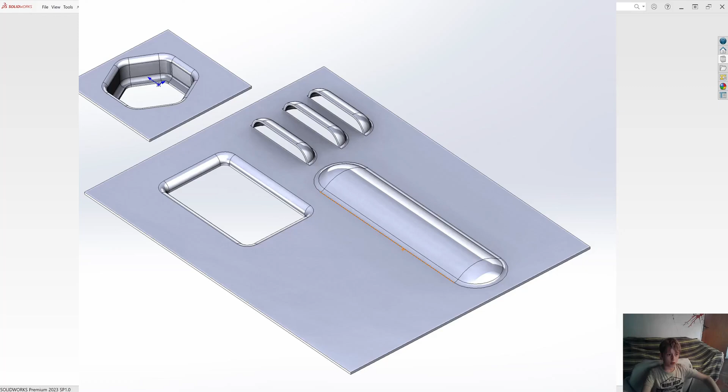I'll click on the home icon, front plane, sketch, center rectangle, 50 by 50 millimeters in terms of overall dimensions approximately, and we'll extrude it by 1 millimeter.

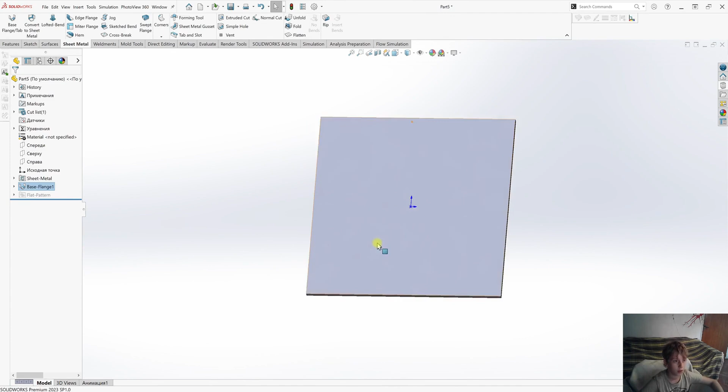I created this base to demonstrate how the library works. Let's go into the stack of books icon. At first, we don't have a design library folder here.

To specify the path where our library is located, we click on this button. This is the file location. Here, we set the path to our file and specify the design library here. Now the design library appears, and after that we can add components to our part.

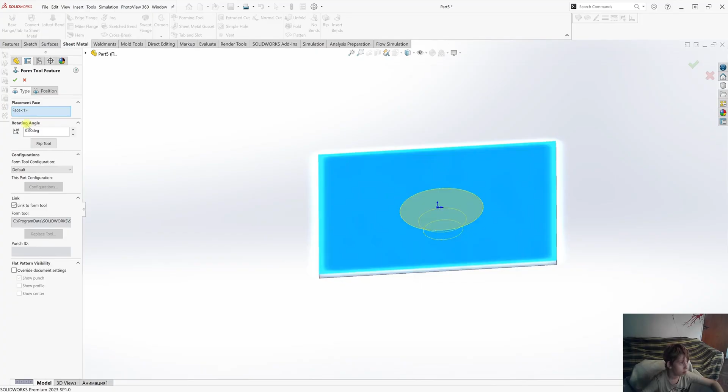Design library, let's say emboss, and let's insert, for example, this element. We can see that when we insert our element, several settings appear. In these settings you can specify several parameters.

The first parameter is flip tool. With it, we can indicate which direction our element will be extruded. You can also specify the position of our element here. It has a point that allows us to move it, and we can also set dimensions for it.

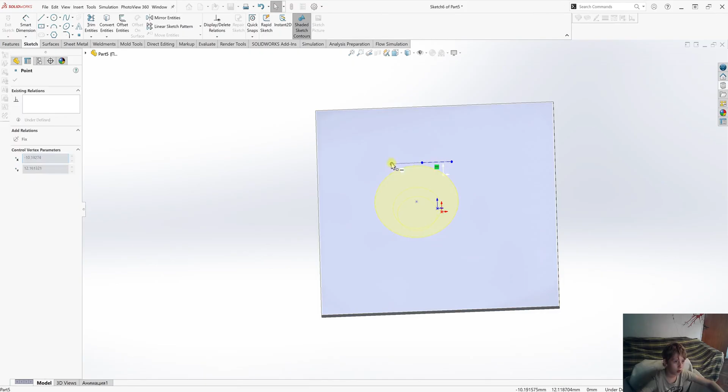Now I'll show you how to create another element. By clicking on the point and creating another point, another element will appear. And we can see that this kind of element has been created.

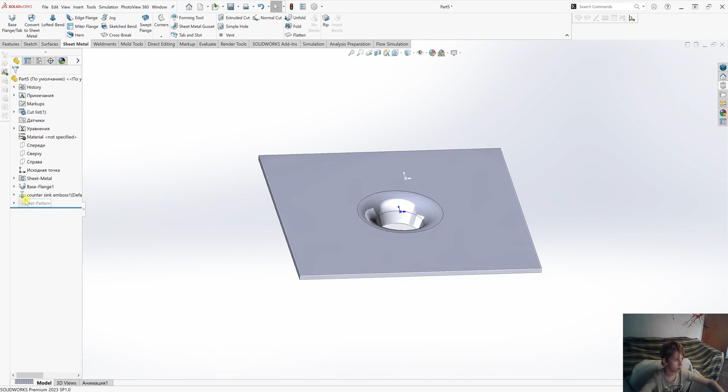Now I'll show you how to edit such elements. After that, I'll explain how you can create them.

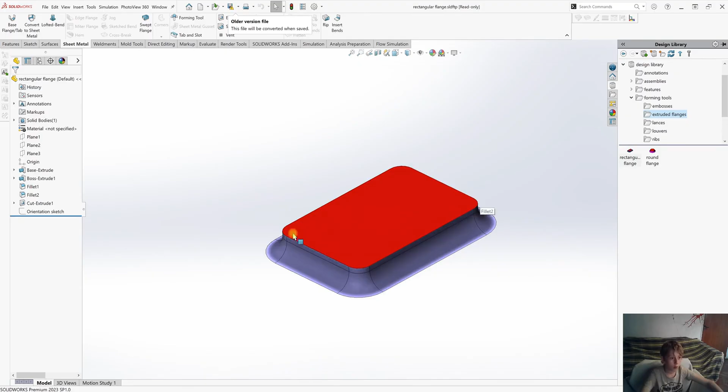Let's select, for example, rectangular flange from the extruded flanges folder, right click on it, and choose open. We select open read only. We can see our element. To edit it, go to boss extrude and select edit sketch.

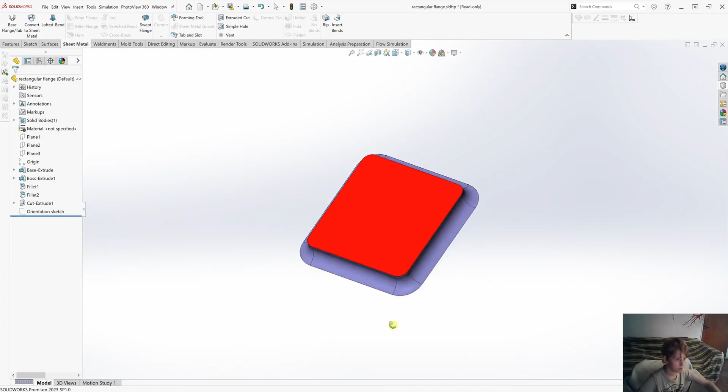Let's change 20 to 30 millimeters. It says that we are modifying an old file. 30 millimeters, okay. Next, for the extrusion, let's set the length to 70 millimeters.

Then we'll edit the base extrude sketch in our design workspace and change its width to 60 millimeters. Exit the sketch.

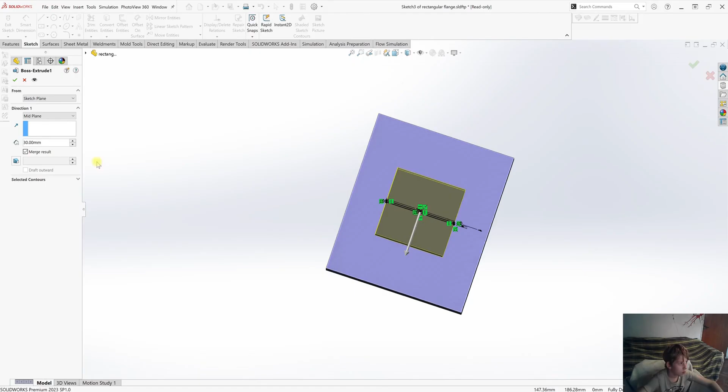Now let's change the length of our flange. Instead of 30, let's make it 50 millimeters. Okay. Now we can see that the flange has been lengthened. And we can also save it.

File, save as. We can save it either in SLDFTP format, or we can save it as a regular format, as a SolidWorks part. Click Save As, copy and continue, and let's save it.

Honestly, I really should have changed the file name earlier. I'll go ahead and set the name to larger rectangular flange right now just to make things clearer. I'll remove the format here to avoid any errors, in case you accidentally added an extra letter, and then I'll click save. Save. And it's saved to our library directory.

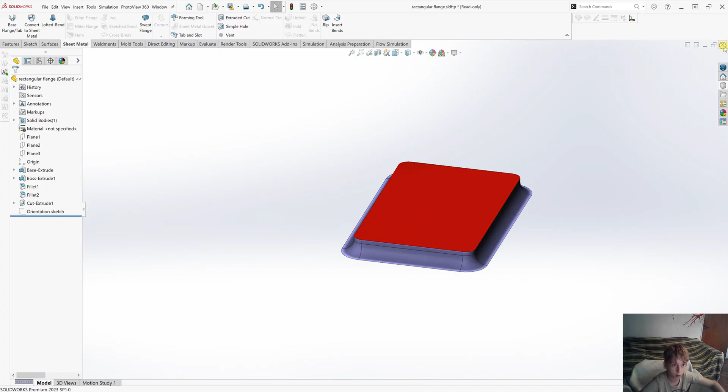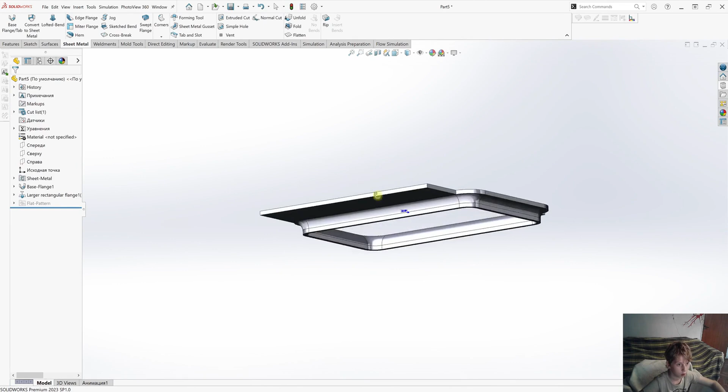We can close this file without saving, and then in this file, go to the library and see that our file, larger rectangular flange, has appeared. Let's insert it by dragging it from the library with the left mouse button, and click OK. You can see that our flange has appeared right here on the screen.

Our rectangle is just a bit too short. Our flange doesn't fit into it. You can see that it has appeared. It's been cut out in our plate.

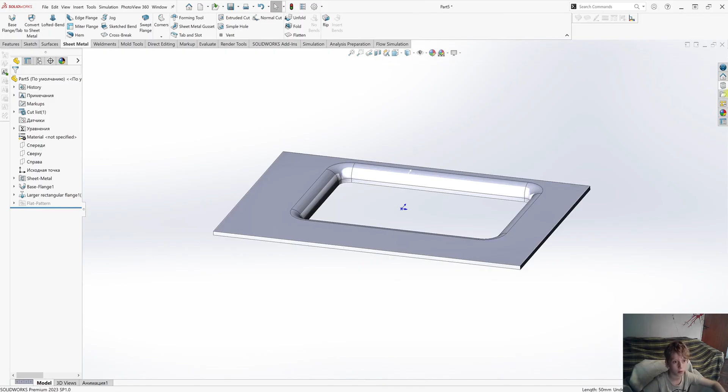Now I'll show you how to create such elements yourself. Let's close our file, we don't need it anymore. New part, front plane, sketch.

Let's draw a rectangle 50 by 50 millimeters from the center, measuring exactly 50 by 50, and we extrude it by 10 millimeters. This is the base we've drawn for our element.

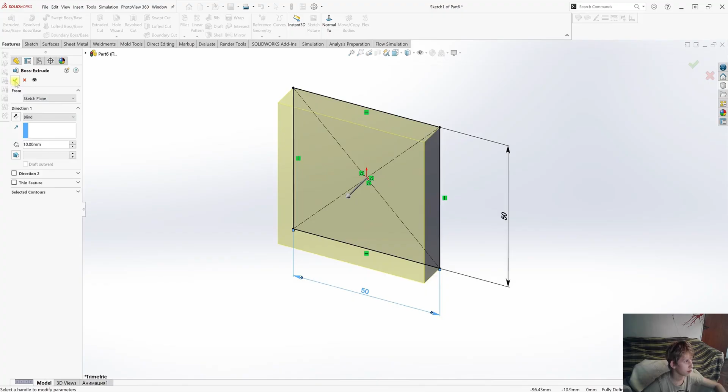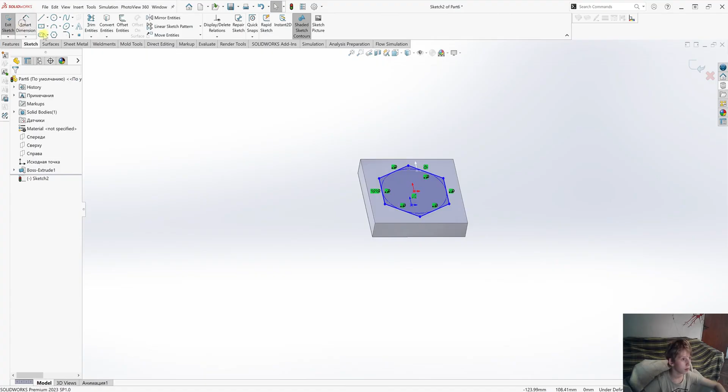Now, on this plane, we draw a sketch, select polygon, 6 side, Ctrl 8. We make the lines parallel to each other and then carefully adjust and set the width to 30 millimeters.

Next, we extrude it by 10 millimeters as well. We make a fillet of 5 millimeters. As you can see, it suggests the entire perimeter, so it applied it to the whole perimeter.

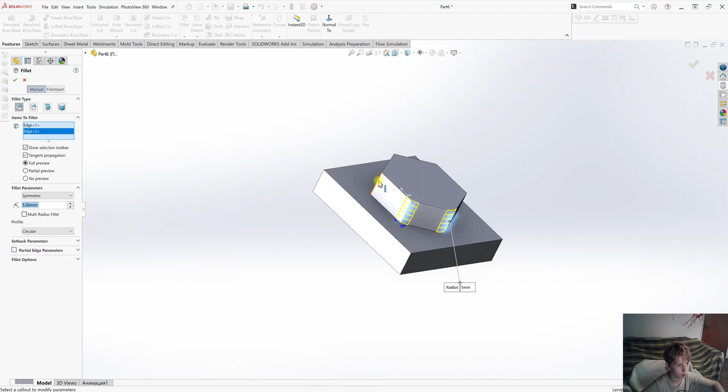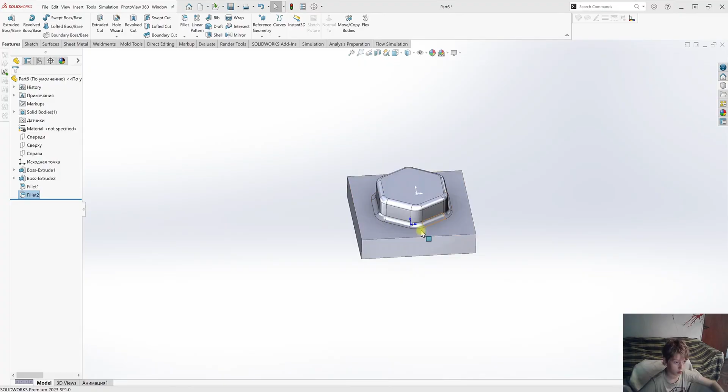Enter. Again, fillet, 2 millimeters. We remove the upper edge face and also the lower edge as well. Enter. I added the rounding because sometimes sharp corners can cause errors in the library, that's why I rounded them off.

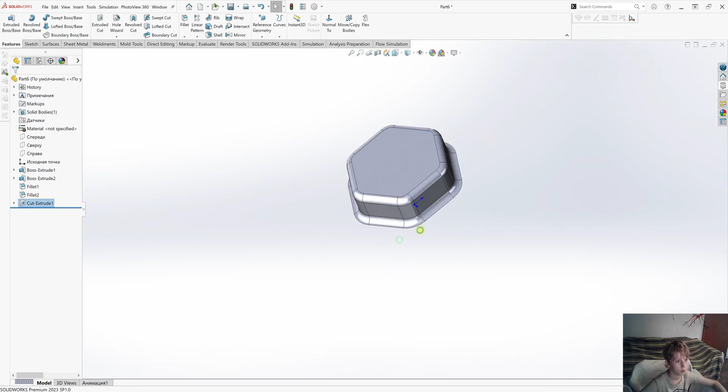Next, we'll cut off the base. Sketch. We carefully convert our edge and cut off our base. Okay. We end up with this kind of blank.

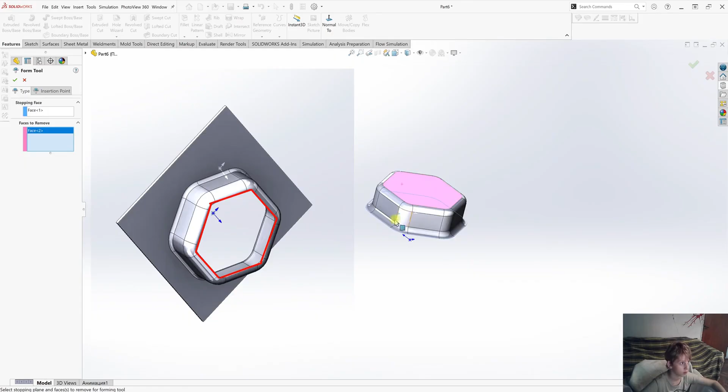Go to Insert, Sheet Metal, and Forming Tool. Select the face that will be on the surface of our part. Next, select the surface that will be cut out. Wait for the insertion point and select our point. It created an automatic sketch.

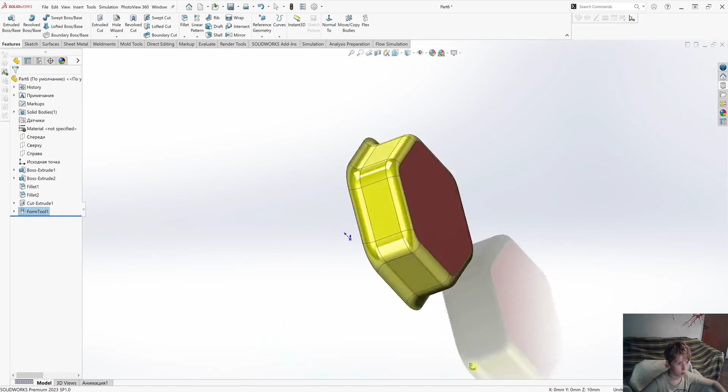If it doesn't create a sketch, you draw it manually on this surface the same way it would have been drawn automatically. Next, go ahead and click OK. We see that our part is colored in different colors. Red indicates cutting, blue is for fixing, and yellow means bendable edges.

Save as, and save it either in the SLDPRT format, but in that case, you need to save it specifically in the library directory, or in the library format. Then you can save it anywhere you like, and SolidWorks will find your element itself.

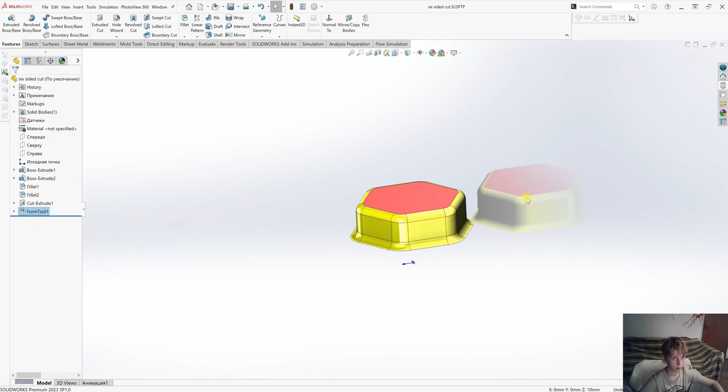I select Forming Tool, SLDFTP, choose the format, and here I'll enter the name. Next, I'll write six sided cut here and drop it into the Forming Tools and Bosses library. Okay, that's it, it's been saved and we can close our element.

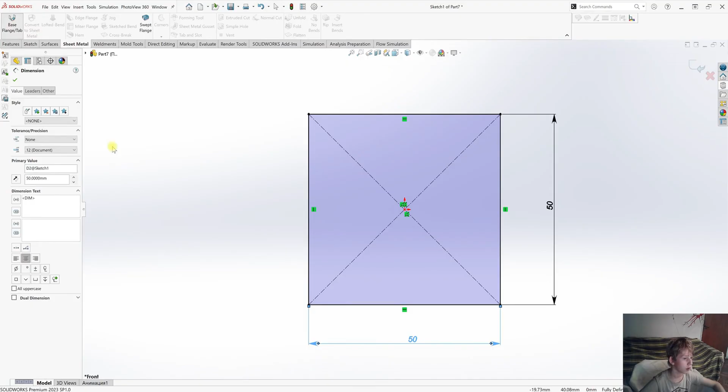Let's create a part. Sketch on the front plane. A square, 50 by 50. Extrude by 1 millimeter. Next, we open our Embosses library and find our six sided cut here.

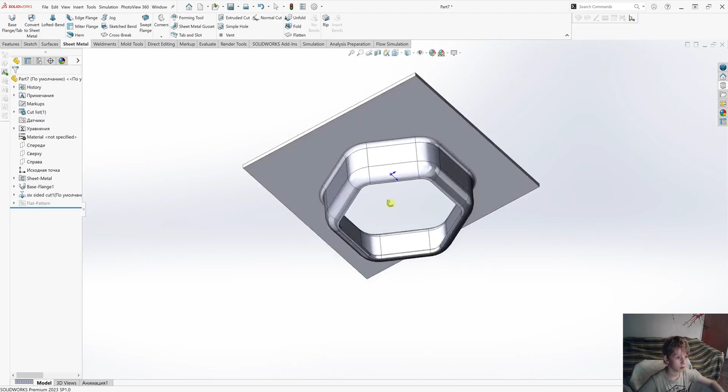We move our surface, set which side our element will be cut from. Press enter. Excellent. The cut has been made.